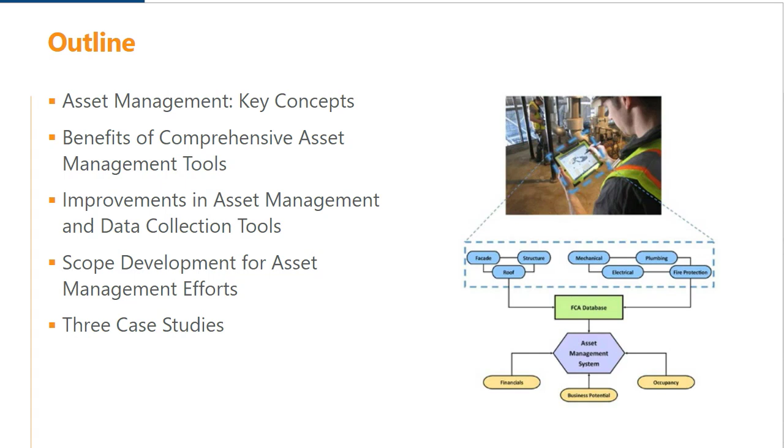In general, any organization with a large number of physical assets and limited financial resources and time, that's us, can benefit from a system to objectively gather condition and operational data about those assets to make data-driven, informed decisions about repair, maintenance, replacement, or even reinvestment of resources towards or away from an asset or group of assets.

The better the information that goes in and the clearer the understanding of your organization's context, the easier it is to make better decisions, especially when the right answer isn't obvious.

To begin any asset management effort, a clear and direct strategy for prioritization is needed. It's the cornerstone of an asset management program. It's needed to consistently address the large volume of actionable information that's generated, the spectrum of conditions worth considering, and to make best use of limited resources and time.

In the realm of building enclosures and structural assets, once any truly critical or hazardous conditions are addressed or stabilized at their earliest practical opportunity, and we recognize such conditions are pretty rare, owners have a ton of discretion about how to prioritize maintenance and repairs across the portfolio of your assets.

One strategy that we've developed and employed with other institutional clients recently has been the use of a customized relative risk-based scoring index for the conditions found in a systematic condition assessment. The overall premise is pretty straightforward. The more risk a given condition embodies relative to the others assessed by the same methodology in the portfolio, and

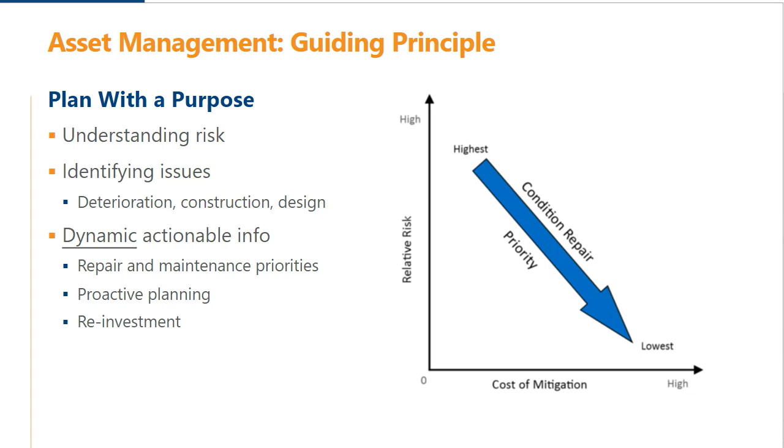It helps you identify the low-hanging fruit that's not in plain sight and differentiate what matters most when the choices get tougher. With all of the data we have access to about our facilities, our business operations, financials, and other things, a prioritization strategy and even consistent and high-quality data aren't by themselves enough to wisely and proactively manage a

large and diverse portfolio. Rather than a mountain of reports or raw data on individual structures or facilities, decision makers need that ability to interact with the data, to mine it, analyze it, and compare it in context of operational priorities and financial projections, both for capital planning as well as planning for repairs.

An interactive asset management database is increasingly imperative to steward any large or complex organization's resources well in the long term. To construct one, data is often needed from both within and outside your organization.

Too much or too little input or influence from within or outside your organization might result in misalignment of your asset management approach and system with your organization's needs and goals.

As the owner or manager of a group of facility or infrastructure assets, regardless of your business or organizational model, you are the expert in understanding what matters most to your organization's success. A good asset management database or application needs to reflect the operational priorities, financials, and overall strategy of your organization as you define it.

With regard to buildings, infrastructure, and other structural assets, they are very often a necessary means to an end for your organization. As such, viewing them as assets in that context requires collaboration with your consulting team developing your asset management program, such that your facility assets are appropriately understood, and this is consistently reflected in the prioritization systems you implement. An independent, experienced consulting team can help you assemble the technical condition data about your assets that you don't have right at your fingertips.

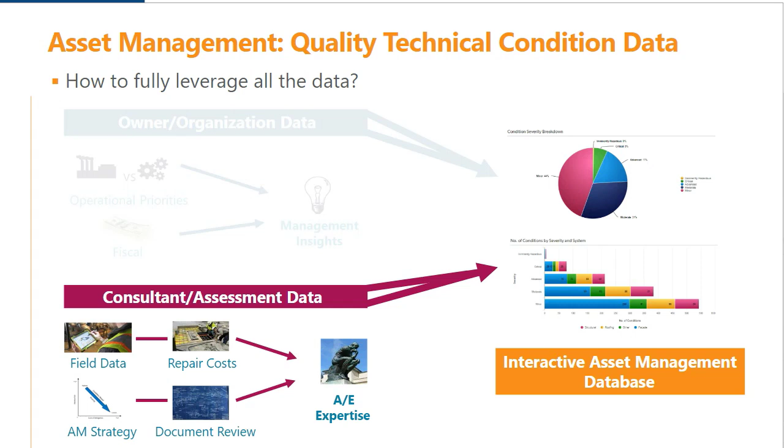Planning for maintenance and repairs to building enclosures and structures isn't new, but we've noticed an increasing need and demand for organizations to integrate assessment and planning for the skin and bones of their organization's physical assets with the many other types of assets that they manage.

This is perhaps a natural result of a couple things. There's been a lot of advancement in data collection and management technologies that we'll touch on later, and there's been a bit of a collective shift in society's view of the permanence of buildings and physical infrastructure as it relates to operations of our organizations.

We're looking at and using buildings and structures differently these days, particularly as it relates to our workplaces. They are finite, temporary assets just like anything else.

Though other commonly managed facility and organizational assets are products or fabrications that may more easily lend themselves to a predictable life cycle of wear, tear, repair, and replace, building enclosure and structural systems too can be evaluated and characterized in such a way that their condition, repair, and replacement data can be incorporated into existing asset management programs.

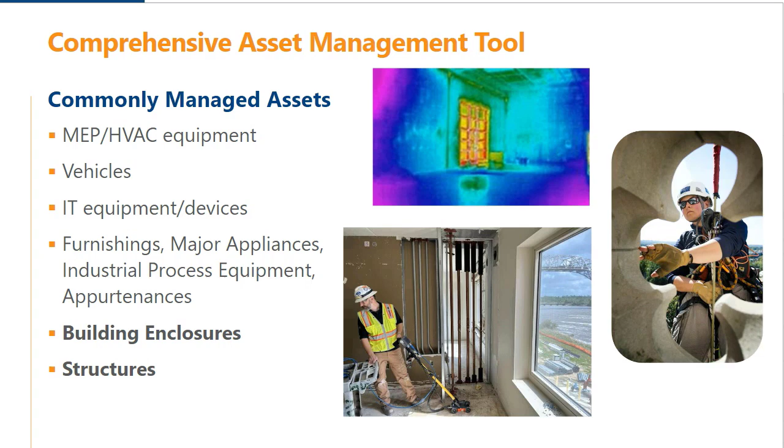Since enclosures and structures have a relatively long lifespan, but also have a relatively high cost of repair and or replacement, which can be reduced and deferred respectively with appropriate maintenance, incorporating planning for those repairs and maintenance into your organization's bigger asset management picture will help you anticipate challenges and avoid needing to react to unexpected large-scale enclosure or structural problems. How do we achieve this kind of integration?

Whatever your specific goals, a well-constructed, comprehensive asset management program should empower you to make objective, data-driven decisions about your assets to maximize value as you define it. Whether looking to prioritize capital planning for repairs over $5,000, to sell underperforming or overly taxing facilities in your portfolio, or to create a 20-year campus improvement master plan, incorporating periodic and specific systematic condition assessment data of your building enclosures and structures into your asset management plan is fundamental to understanding where your organization's facilities are at so that you can chart the way forward.

I'll turn it over to Sarah, who will lead us through some of the advancements in technology that we're seeing these days.

Thanks, Kurt. So while asset management is not a new conversation for WJE or the industry, there have been significant technological advancements in digital data collection and its analysis, as well as database software in recent years.

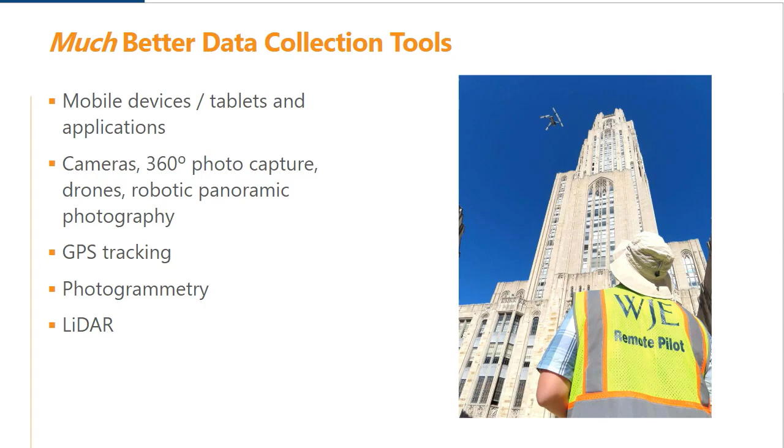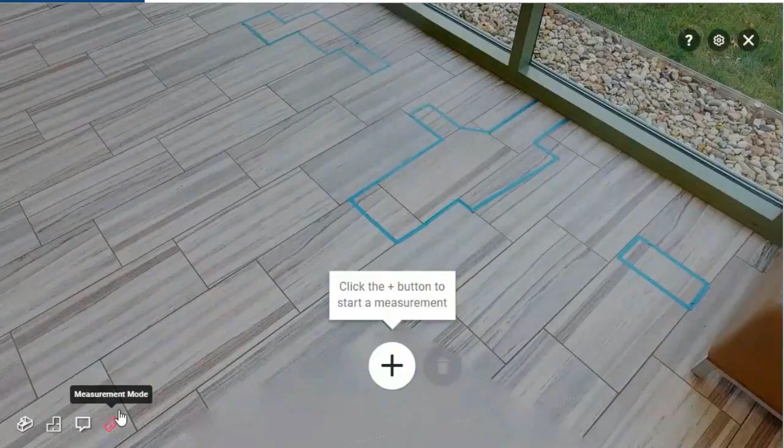Photogrammetry models and imagery have been used in real estate markets for quite some time, with numerous apps and programs applicable to the asset management world. They just need to get integrated into everyday use.

The data collection tools may be driving the progress in the asset management world, but tracking and management tools are improving too. We're in the Internet of Things age, where just about everything is somehow tracked or characterized online. Particular software packages all have their strengths and limitations, and new products and features are always around the corner.

Similarly, for many of the mainline asset management software products, there's a whole category and cottage industry of third-party developers who can help you build custom add-ons, integrations, and visualizations. Software innovation is a hallmark of our world in all industries right now.

What's important and new regarding asset management software and database applications is reflective of the trends in software and applications for other aspects of our lives. We can ask ourselves, are the software and methods we use to manage our workplace assets on par with software we use to manage our social media, fitness, or other things that are valuable to us?

Where tools and software are always changing in this data-driven world, the need to develop an appropriate scope to obtain actionable information remains constant. So how do you select the right scope for your goals and objectives? Consider, what decisions are you trying to make? What data are you making your decisions on? And who is helping you tailor your data collection scope to meet your needs?

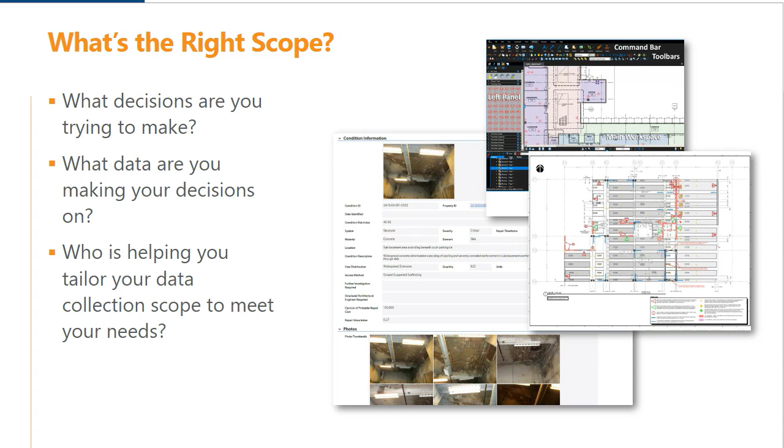Some strategies may look good on paper, but the greatest challenge lies in consistently gathering data and applying that prioritization strategy across a diverse range of conditions, so that the forest can be seen through the trees, like Kurt was talking about earlier. And because of the quantitative, qualitative, and somewhat subjective nature of condition assessment, clarity of evaluation and prioritization approach and appropriate professional experience is needed to turn these raw observations into appropriately consistent, actionable information within an asset management database.

Sometimes in property or facility condition assessment reports, we'll see basic language such as, repair brick, or repair corroded steel, or my favorite, repair and maintenance of the roofing will help prolong the life of the roof. Thanks for that. But for some due diligence assessments, that level of detail can be not only appropriate, but desired. For other instances, it may not meet an owner or property manager's needs. They may already know that their roofing assembly has localized deficiencies and that repairs are required.

That's why they called a professional in the first place. Statements like these do not provide them with usable, actionable information, whereas the modified examples on the right provide much more detail, but require more effort and time on site and time in creating the deliverable itself, since they include conceptual repair recommendations, location information, quantities, and describe the causes of distress.

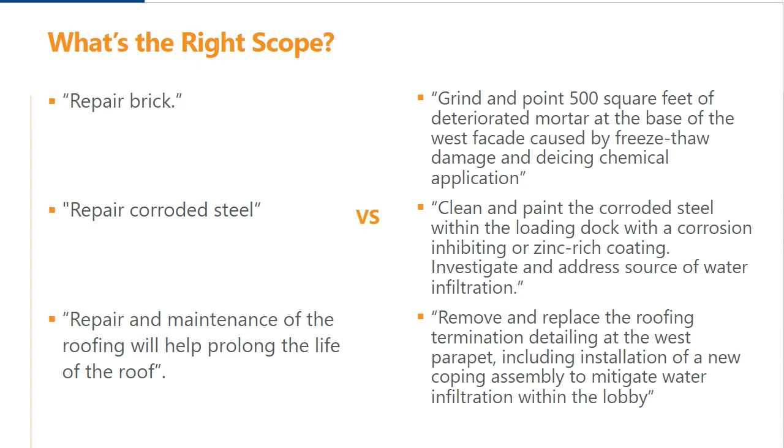Well, we have three case studies to present to you today that exemplify and illustrate these concepts that we've been just talking about. All three of these case studies are different. They have different scales, different project types, different reasons for being used, and different regions of the country. But the tools and the principles of data collection and managing these assets is the same for all of them. So I'm going to start with a case study on roofing condition assessment and long-range planning.

There's a school district in Texas that we've been working with for over 20 years, and for 15 of those years we've been tracking their roofing assets over many properties. This particular school district has about 92 facilities, a total roof area of about 9.7 million square feet, and roofs that range in age from 1 to 32 years of all different types.

What they really wanted to do is extend the roof life cycles and optimize the life cycle costs. It's a substantial amount of money in terms of replacement dollars embodied in 9.7 million square feet of roofing, so the annual cost of maintaining and ultimately replacing those was considerable.

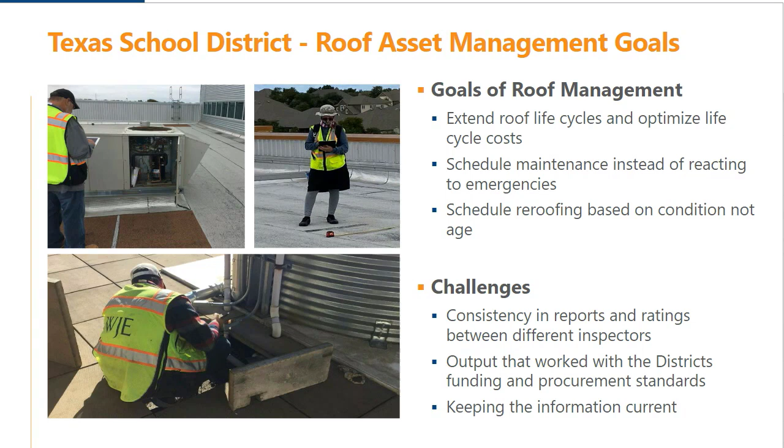The life cycle cost is a big piece of this. Just considering the current value in today's dollars of 9.7 million square feet of roofing, we estimate this school district has over $290 million worth of roofing. If you figure the average life of a low slope roof is 20 years, you'd need to replace 1/20th of that roofing area every year, which comes to about $14.5 million a year in investment in new roofs.

If the roofs only last 15 years because of neglect, poor maintenance, or other reasons, that number would jump to over $19 million a year. But if instead you're able to extend the life of those roofs even 5 more years to last 25 years on average, that reduces it to about $11.5 million. So it's really substantial savings year over year that could possibly be gained just by optimizing maintenance.

The real key to that is being able to track and manage, and give attention to the ones that are most in need when they need it.

So we started by surveying 15 to 20% of the facilities each year, so each roof or facility would get inspected a few times during its life. We compile the results and continuously track them, collecting the information into a database that's available online to the school district and all the other project stakeholders, and then we can plan for major expenditures and track them over time.

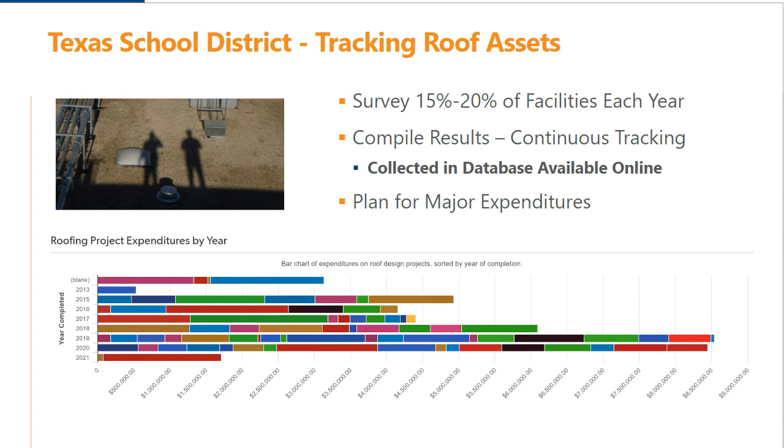It's a cyclical process, a continuous cycle, starting with understanding the condition of the assets, addressing the current problems, and then planning for the future.

Our focus was on things that were likely to cause problems with the building, meaning leaks primarily, but also durability, because that's what ultimately would lead to the roof wearing out early—conditions that would allow water to get into and underneath, things like metal flashings corroding, and other issues that might shorten their life. We also noted things that would pose risk to maintenance personnel, since our opportunity on the roof is to see and identify these things, so we bring those up as well.

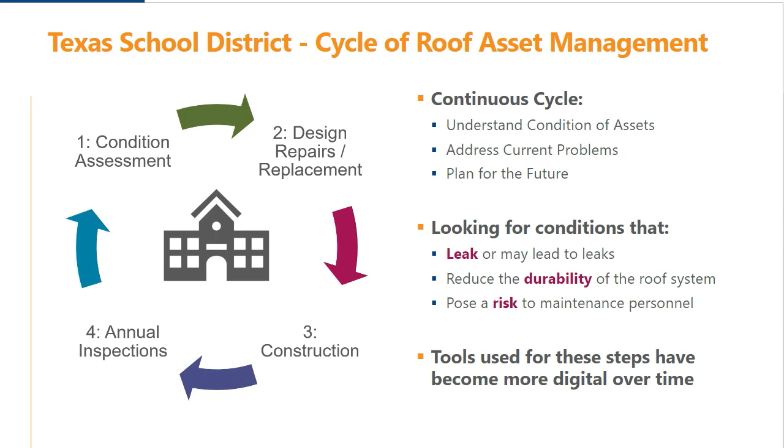The tools we use to do this have changed over time. Our field data collection tools really started with paper and pencil, hand calculations on ratings, and then typing reports.

Over time, we switched to using spreadsheets for tabulating and analyzing the data we collected, which increased volumetrically over time. Paper and pencil field notes gave way to using tablets to collect data on the roof, with smart tags placed on roof plans that included item types, severity, embedded photos, descriptions, and recommendations. We started out using Bluebeam for this, then moved to a program called PlanGrid because it offered increased flexibility for us.

We're now transitioning into using an in-house app that offers more customization and flexibility about the data we collect and being able to automate some of those processes. Digital photography has definitely improved over the years, and one of the things that's been really helpful is to have drones so that we can get to hard-to-reach places. It probably won't surprise many of you that there are some roofs that are just really difficult to access, and if you've ever climbed a 30-foot ladder to get up on a roof, that could be exciting.

Data has been collected through a variety of different sources. We started out with Microsoft Access databases after we kind of moved away from spreadsheets and a variety of other SQL databases over the years. Currently, we're using a database on the QuickBase platform. And one of the things that's been helpful is collecting descriptions and recommendations and item types that we've collected over the years, so we can get better consistency, especially between the reports that are done by different inspectors, and also speed the time of production.

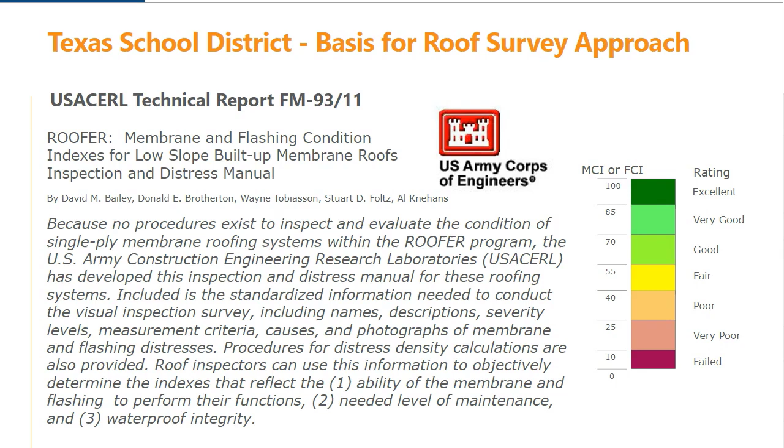We adapted this to these particular purposes, simplified in some ways to really speak to the specific needs of the school district, but then have tracked that, and so we can line these school campuses up side by side and see which ones are the most in need of capital improvements, in particular in terms of roof replacements. And so when it comes time for a bond program to be planned, we can use this to inform which roofs to include in that.

One of the best recent advancements is the accessibility of the data and the information. And this may be something that happens for you too. We had a lot of information that we collected over many years, and so did the school district, particularly when it was paper and pencil, printed plans, binders with reports. All this stuff kind of ended up in a closet someplace. And really the person that had been there the longest was the one that knew where to find these things. Trying to find even a simple thing like the warranty for a roof when we needed to make a warranty claim, or the previous roof plan that was most recently produced so that we could use that for reference, seemed like it took a long time.

Now we have all this data collected together in one place: all the roof sections, the roof surveys that have been done, and the reports and the data that went into it, roof design projects, not only with the plans and specs, but all of the cost data that went along with it and who did the work, and the warranties that are associated with all of these roof sections are all collected together in one place and easy to access.

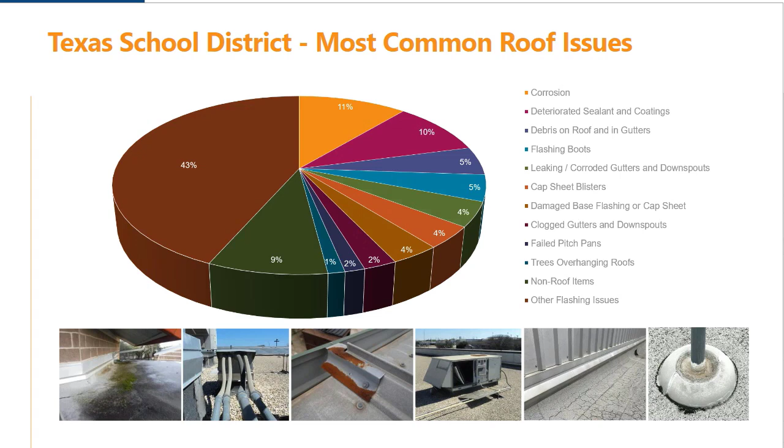And then ultimately, being able to produce reports that detail out what they need to consider for their next bond is something that's been very helpful for them. This is an ongoing conversation, and the current database has allowed us to have unit prices for current market prices for roofing and have these reports be interactive, not just something that we produce, but something that they can produce themselves by asking what things are important.

So really it comes down to focusing on life cycle costing, getting data about the condition and then interpreting that data, and really looking at the long term and trying to optimize the cost and the durability of these roofs. And I think that we've been able to save a considerable amount of money over the years because of being able to get the roofs to last longer and really help this district achieve their goals of optimizing their roof assets.

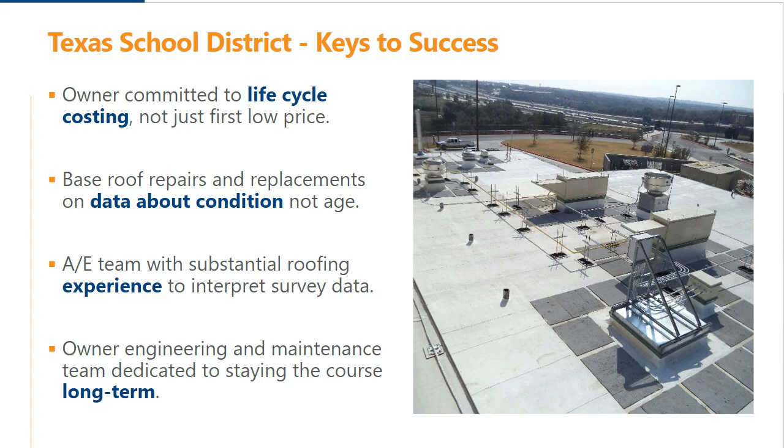Now I'm going to turn it over to Sarah to talk about our next case study. Thanks, Eric. So this next case study was selected for comparison as it's definitely different in its scale and intent than Erik's project and exemplifies collaboration between multiple team members.

For this project, we were part of a team that performed a feasibility study at over 60 vacant school buildings to determine a disposition strategy for each property, including the property's viability for adaptive reuse, or on the opposite side of the spectrum, identifying the building for potential demolition under a blight removal program. We knew our deliverables would be used to market the viable buildings for redevelopment, and in the near term, identify conditions requiring stabilization or hazardous materials, or buildings that could be mothballed and secured as funds permitted until redevelopment could occur.

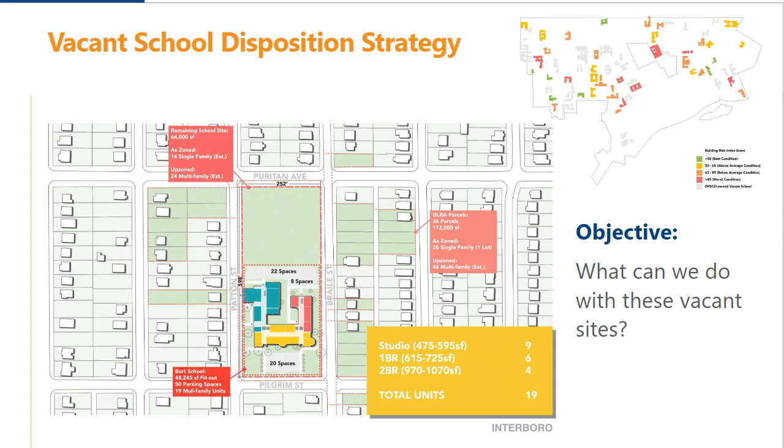To establish a categorized system and maintain assessment consistency across the portfolio of buildings, WJE developed a rating system based on the definitions and statistical methods used in the National Bridge Inspection Standards, which is a scoring system developed by the FHWA, or the Federal Highway Administration. This consistency gave the project team, city, community, and other stakeholders an objective basis to make decisions and allocate funding without some of the sensitivity that some of the communities feel with their ownership of the properties.

Each pertinent condition observed was given a condition risk index, which took multiple metrics into account and assigned a numerical value for how much a given condition affected the building system as a whole. Individual condition scores were then summed to give a total building risk index, which was used to compare and contrast the various properties. These metrics are a numerical expression of our professional opinion of the relative significance of one condition or a set of conditions as they compare to everything else captured in the assessment, creating a common language for the asset management program as a whole.

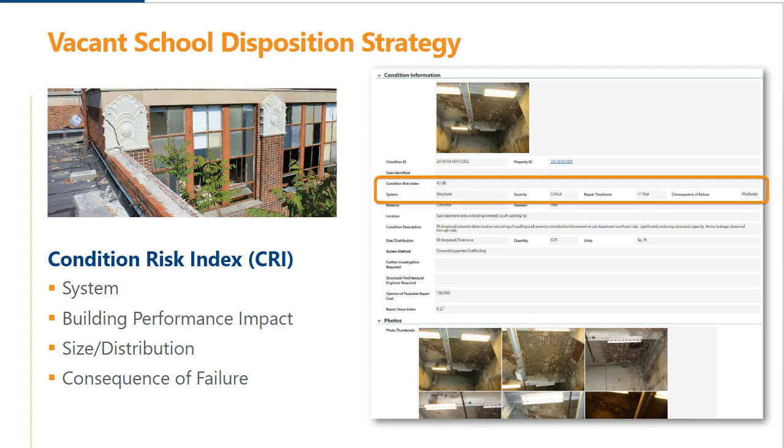The scoring for each observed condition considered the building system it pertains to. For instance, a condition affecting the building's structural system and how it stands is assigned a higher rating than those affecting the facade or roofing systems. It also considered its impact on the performance of the corresponding building system, its size and distribution related to that system as a whole, and the consequences if it were to fail, basically, to continue not being addressed in its current vacant condition. So for instance, distress within a vertical column is more important than distress within a certain floor joist.

This metric also allowed our inspectors to exercise some judgment regarding general risks to the public. So if there was a condition located over a public sidewalk, for example, it was scored a little higher in comparison to an element that was over a roof level or within a mechanical space in the basement or in the back of house.

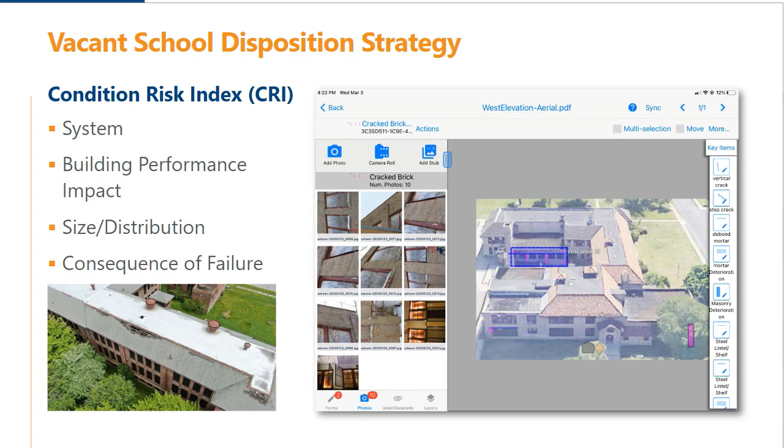The building risk index scores were helpful to the rest of the project team in understanding the current state of the building's bones and skin. It really served as one piece of the puzzle to be used in combination with the rest of the team's findings, of course.

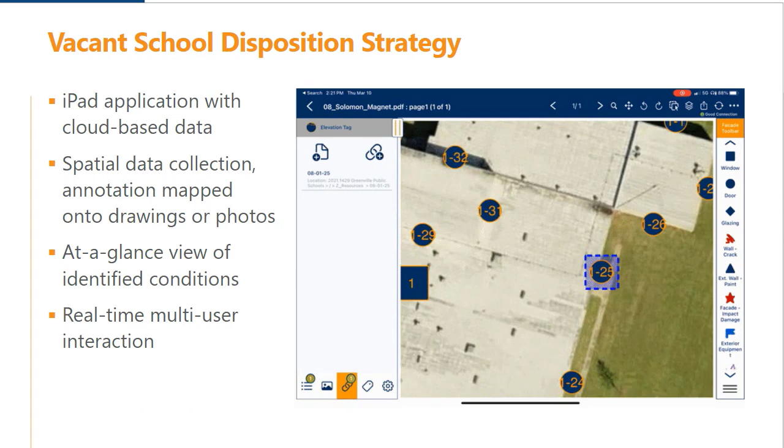To collect all that data in the field, as Erik mentioned earlier, WJE used an iPad application that's developed in-house. Now that's not special, it's just something that we have determined as an initiative within the company. Each annotation contains the embedded data I mentioned earlier, including scoring for each condition, quantities, descriptions of distress, and some conceptual repair approaches or areas for further investigation.

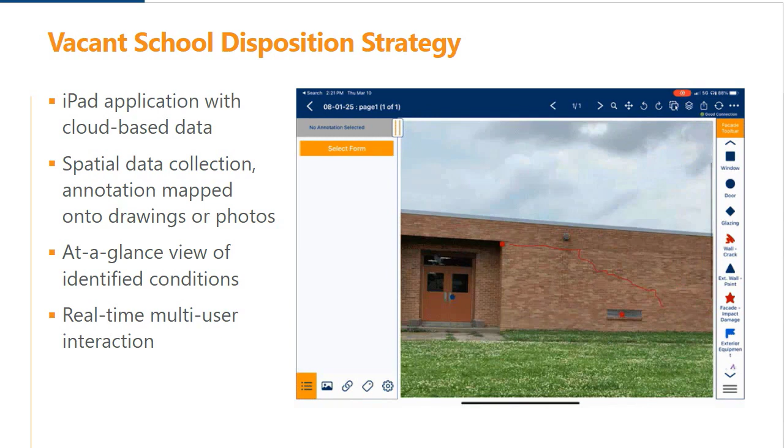Each WJE inspector is able to see annotations from others in real time, increasing the efficiency of the site visit and communication. To process the field data, we utilized a web-based application similar to Erik's. It was also Quickbase, which allowed for collaboration by multiple consultants and stakeholders who each had specific permissions within the system based on their role.

But we're all able to review, analyze, contribute to the data, and collaborate. For instance, once the data was uploaded, the cost estimator was notified to jump in, enabling workflows and schedules to be fluid throughout the project. Other users maybe only had viewing permission and couldn't edit the data.

So here's an overview of what you would see in the web platform. These are 3 individual buildings separated by rows, which contain the basic building information such as your building address, the name of the school, the size, the age of construction, and total restoration costs identified. Within each individual building is another table, which identifies various condition items listed for easy navigation and summarization.

Overall building metrics were calculated based on individual condition scores on the left. The cost estimator was easily able to enter their information in this screen view or dive deeper into each condition to view all the photos pertaining to that condition and all the annotations associated with it.

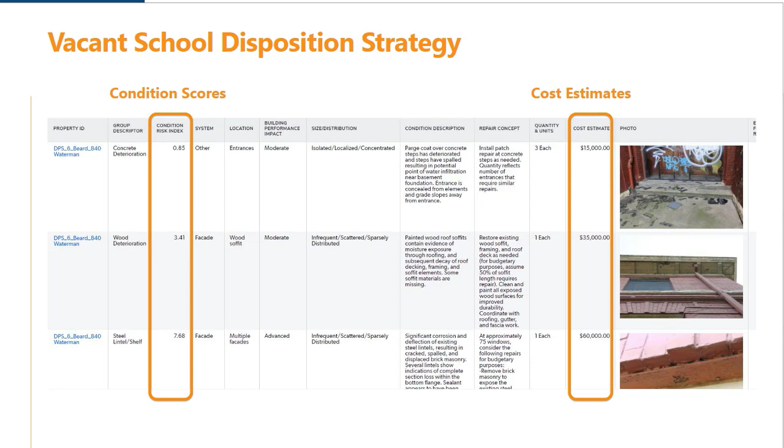Within each condition item, you can see the raw data pulled from those individual annotations taken in the field. Similar types of distress or deteriorated conditions were automatically combined from the uploaded field data based on settings and preferences we defined when developing the asset management program for this client. But as with all automated systems, it's never quite perfect, and human effort is still needed to verify and analyze the information collected. For instance, individual quantities for each annotation were summed, but technical judgment was applied to specify a final budgetary quantity and cost estimate. Some numbers were rounded up, and other annotations that were accidentally categorized together needed to be separated. So some massaging is really needed with any automated system.

The key outcomes of utilizing these data collection and asset management tools included the fluid interaction they provided between the project team and the city in both the field and analysis phases of the project, as well as the consistent data collection and condition scoring metrics that could be filtered, manipulated, and deployed by various members of the project team, as well as the city and potential future development personnel. And data that was usable for all parties in both the near term and long term, as the city has access to that full database, which can be shared again with developers in the future as needed.

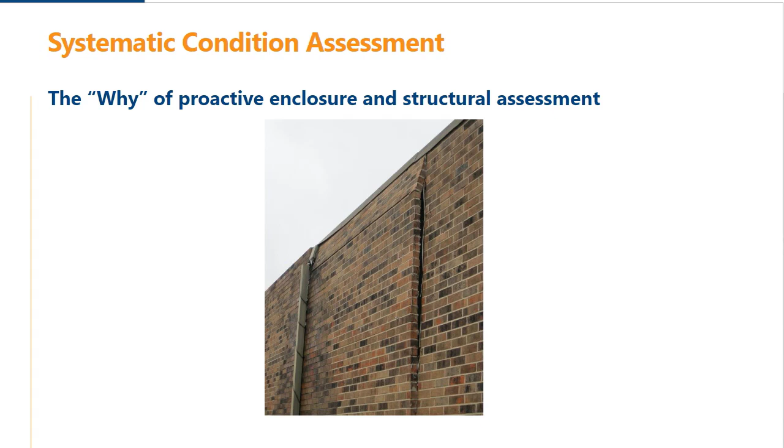One poignant example from this particular institutional client that underscored the need and value of a systematic, proactive assessment was the corrosion and loss of the steel ties laterally tethering the brick veneer in this photo to the concrete masonry backup on this retail store, leading to outward leaning and rotation. In this particular case, we were called out literally two days before this collapsed in a thunderstorm, just in time to identify the hazard and have the owner put up protective fencing to close a portion of the parking lot. The condition had been observed and reportedly progressing for some number of years before we were able to come out and take a look at it, but the significance of it just wasn't understood.

The clients expressed uncertainty, based on this and some other similar close calls, about deferred maintenance related to their portfolio. That was the why of this systematic condition assessment—the desire and goal to move to a more proactive and targeted posture towards building repair and maintenance.

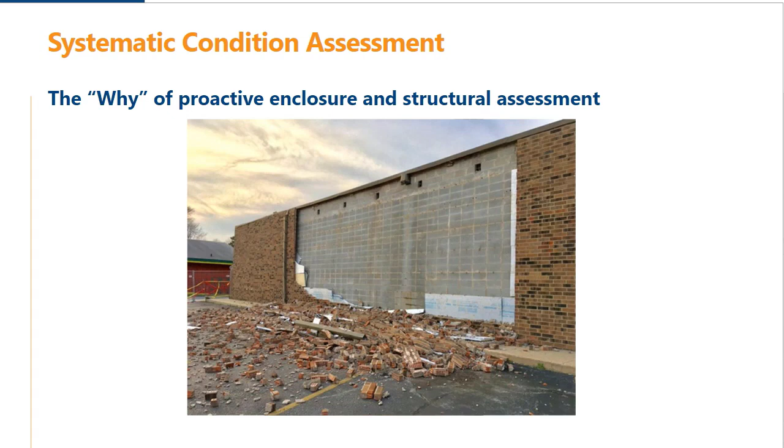To get this done, it took a team of about 25 experienced structural engineers and architects with a broad range of experience with various construction materials and systems to get this done in time.

We established a uniform data collection and categorization system to maintain assessment consistency across the portfolio, and observations were documented again in our proprietary tablet-based field data application.

In order to assist the client in prioritizing repairs across the entire portfolio, we built a custom database site with information and photos completely characterizing each identified condition, and provided direct access to that database site to our client.

The updatable database allows the client to dynamically sort, filter, and search the live data as repairs were implemented, view summaries of portfolio-wide findings, and perform additional independent analyses of the data on their own.

The client uses this information to this day, in combination with other operational factors, to facilitate decision-making regarding repairs and real estate transactions.

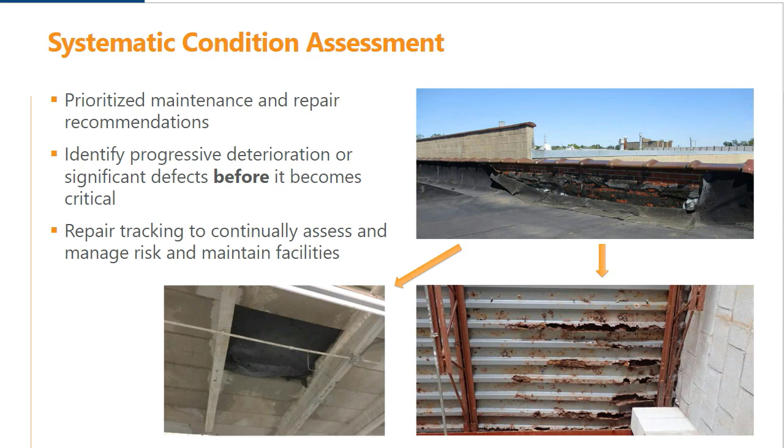As expected, in a collection of facilities of this magnitude, our inspection team found many significant items—approximately 1,250 distinct conditions in total—affecting the gamut of roofing systems, facades, fenestrations, and structural systems.

A relatively small percentage of these were characterized as critical or imminently hazardous distress, in accordance with the definitions we established at the outset as a team, to maintain consistency across the assessment.

Though many of these items were unknown to the client, and some were concealed, an experienced AE provides additional value in helping the client understand the relative significance of each, as opposed to just providing a more traditional assessment running list—a laundry list—with minimal ability to help the client prioritize.

By consistently applying, based on our collective experience and project-specific training, the assessment-specific definitions of these terms, such as critical or imminently hazardous, we characterize the severity and nature of the distress we observe in a way that provides clarity to the client about where specific conditions fell on the spectrum of bad. How bad is bad, really?

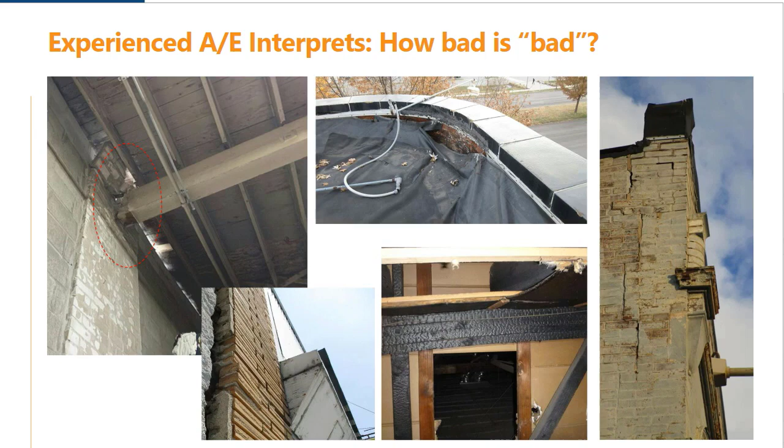In enclosure and structural asset management projects, AE experience is also helpful in helping the client differentiate between the not-so-obvious choices, when it's not so bad. There's value in having a professional guide you into being able to differentiate between the medium things that are not so obvious.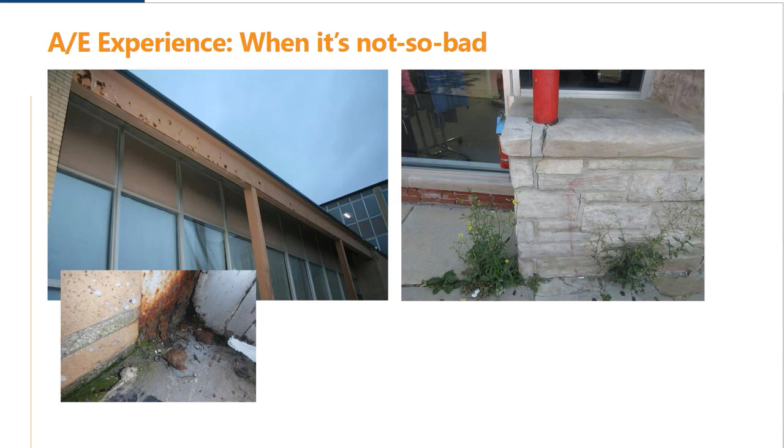It's generally easier to suggest that a presenting condition needs to be fixed, and fixed soon, than it is to understand, based on experience, that it can be reasonably deferred if time and funds are limited and other items are more pressing. It causes us in the field to ask some deeper questions.

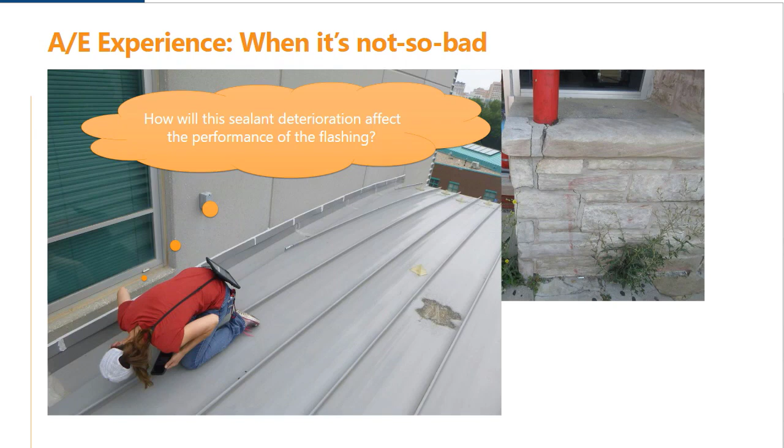Well, how is this sealant deterioration really going to affect the performance of this flashing? Or, there's this splitting in this glulam beam—is it structurally significant? But behind those granular, surface-level questions, they're all aimed at answering the foundational question: how important is this condition I'm looking at right now relative to the other conditions we've observed, really?

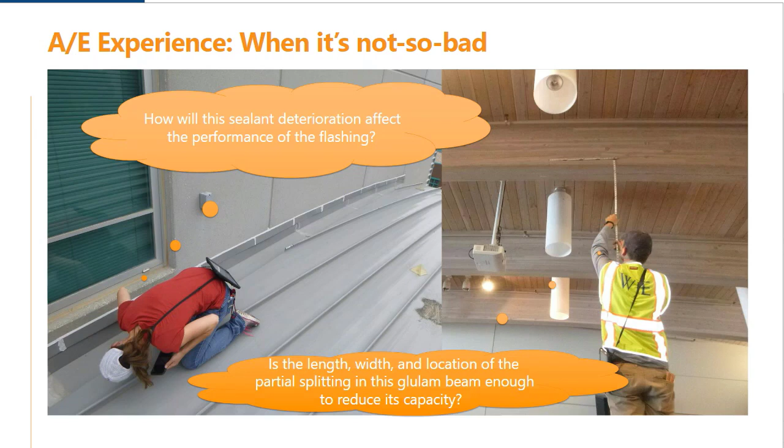But for the majority of items, we're just helping identify things for long-term repair prioritization.

Not explicitly a goal of the study, but one of the key outcomes that emerged from the quality of data was the ability to identify the 'stinkers'—the buildings where operational value versus what was going to go into the skin and bones of the building long term was no longer of value to the client, and they were able to make decisions about letting go of that one and selling it. We know of numerous facilities for which our data was helpful in identifying those stinkers, so to speak.

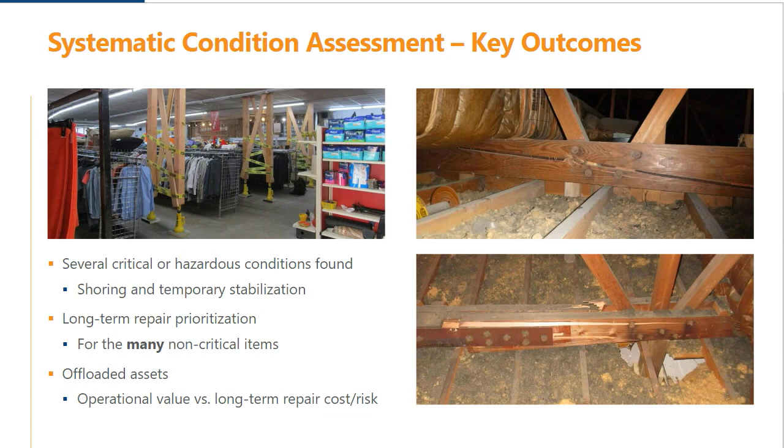The real power of a systematic condition assessment and an interactive asset management database lies in the ability to break down the big challenge into small, bite-sized chunks, objectively and consistently, without undue influence from human perception.

Hey, we're all wrong sometimes in how we perceive things, or being beholden to the 'squeaky wheel gets the grease' kind of mindset. We can step back and see the big picture to make objective decisions based on the facts embodied in the data.

The totaled scores of condition risk indices and things like that for each asset or group of conditions, paired with cost information or other pertinent data, allow for an unbiased prioritization and offer other powerful insights into the data, mining and charting it to identify overall trends and planning opportunities.

Coupling asset management approach and interactive database tools with the capability to efficiently amass data for multi-asset portfolios unlocks powerful perspectives from our experience to help the owners in prioritizing allocation of repair resources where they will do the most good.

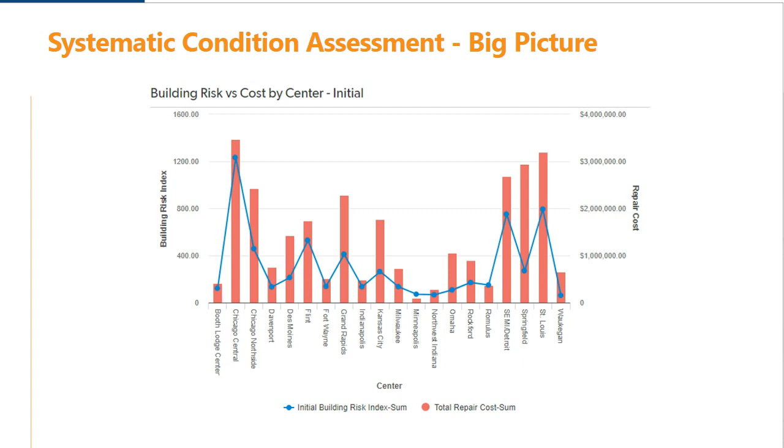Looking at, say, the same portfolio regionally, we can see that in some cases, we're looking at relatively low bang for your buck in terms of the amount of risk we'd mitigate investing, say, in one region versus another, by looking at risk index score as compared to anticipated repair costs. And so that can help target resources specifically.

We can further break that data down building by building and see that, again, like that stinker index suggested, some buildings, like the really tall red one on the left with the low blue outlier, that may be one that you want to unload and sell, whereas some others where you have a high cost value for what repairs you're going to put in and relatively low risk index, those are no-brainers that, yes, we want to try to stay on top of repairs and maintenance.

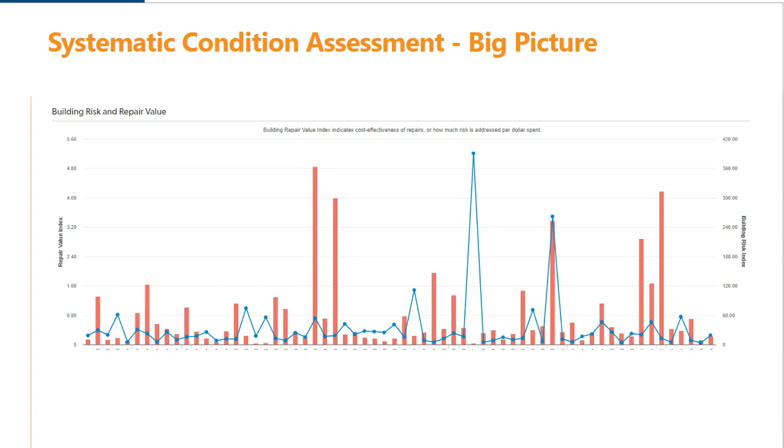Also, by periodically updating the database as repairs are completed or new and updated assessment information is available, owners can track progress and more easily shift priorities as new information becomes available.